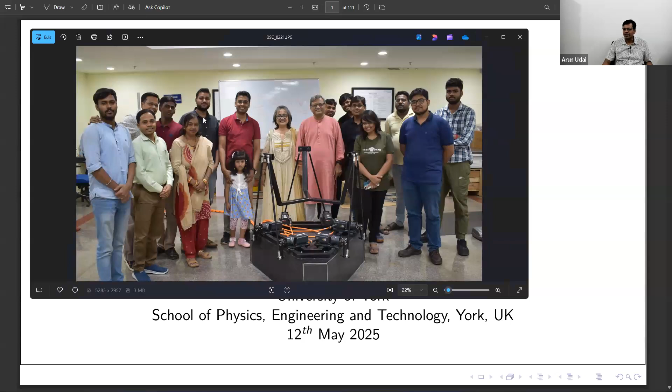So this is my whole team, including my director's wife, and my colleague. He is also there, he's Jafar Alam, and my PhD students, my master students, office staff, my wife, Jafar's kid, and MTech, BTech students are here. Manish, if you remember, he is my son, the younger one. Oh, wow, he has grown up now. He looks like you. His interns, BTechs, MTechs, my PhD scholars are behind, and he is also my PhD student.

He has actually worked on parallel robots also, and the remaining two are working on human robot collaboration. One of them is Indmani. The other one, Ashish, has done the work that you saw, that ocular robot thing. So exactly he has done it. So other pictures, I'll just come to the lab now. Hope I am not taking too much time. No, don't worry.

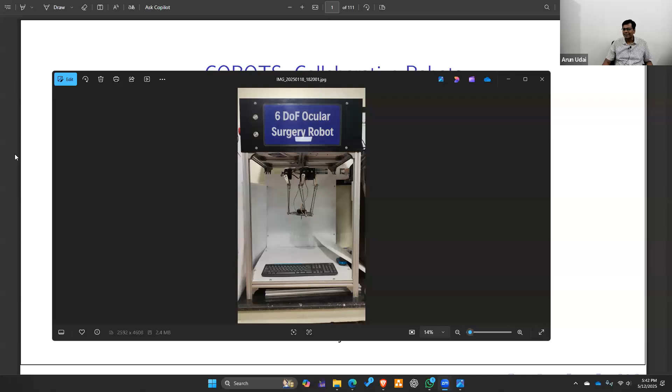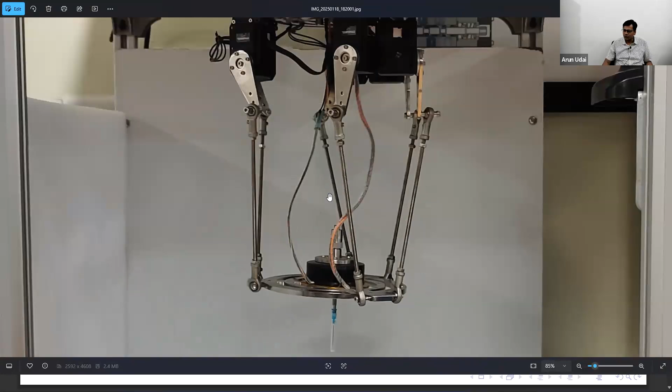So this is the ocular robot setup. It has this hanging structure, that is a 6-DOF structure. It has a rotating mechanism which is here and a provision to insert a tube from here so that it gets delivered through this needle. The needle is here, which is actually rotated. And while it rotates, you can do all 6 degrees of freedom motion using this. This whole machine was designed and developed by my PhD student, and he did the experimental work as well as the theoretical validation.

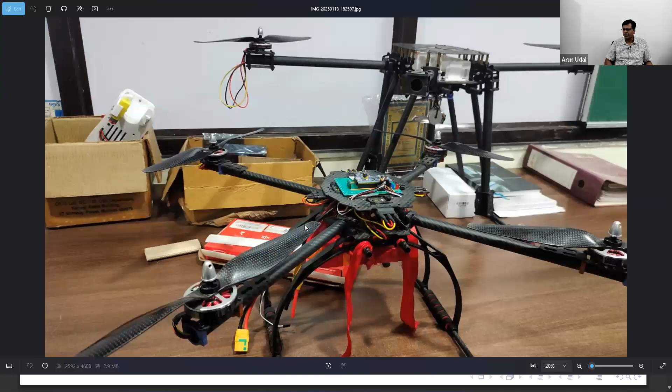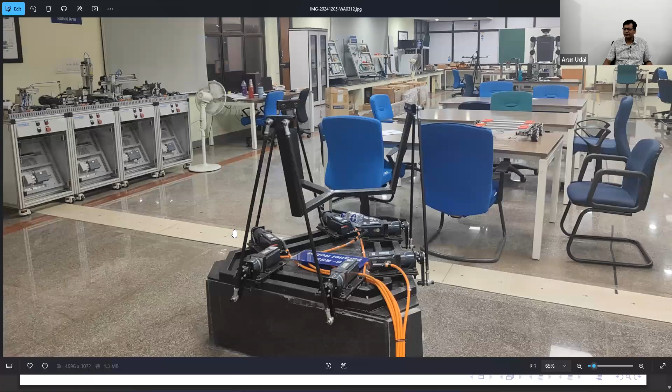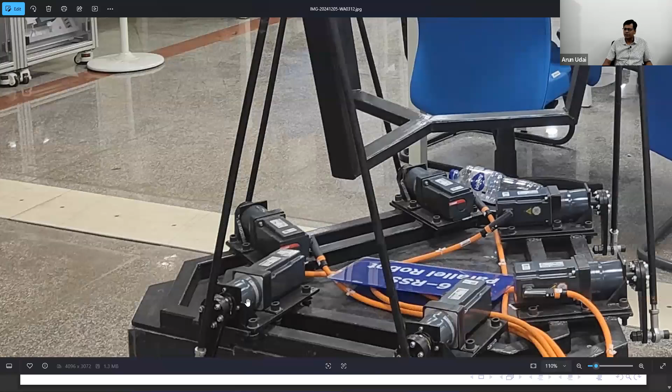So this is again a 6-DOF parallel robot that my PhD student Himanshu has built for his work. It is all built on industrial servo motors. These are all Beckhoff ones with gearbox and joint. The whole structure was built in house. So this is one structure that is there. So this is my lab. There are many such. This is a pneumatic, electro-pneumatic setup which is there.

Okay, this is a complete humanoid that I am working on in my project with DRDO. That is a defense related project, Human Robot Warfare Mission, Government of India. So it is from that, and that is for a different purpose, for doing some human robot collaboration. So this is a parallel robot, and sensors, actuator sets that we have also here.

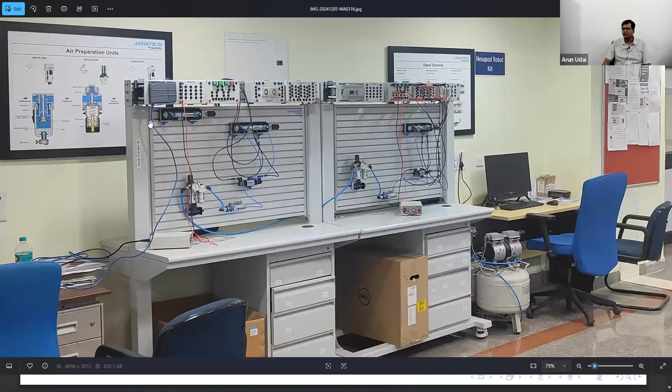So this is how my lab looks like. It's quite shiny and new, just 3 years old. This is PLC systems, PLCs of different makes we have. Okay, and this is the automation setup that I showed you earlier. This is actuator training setup. This is a customized setup that I got built in our institute only.

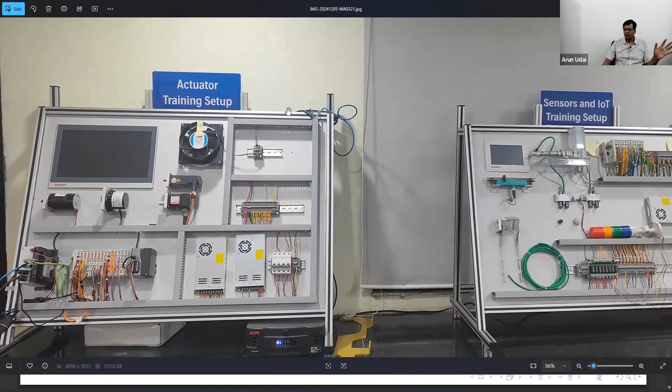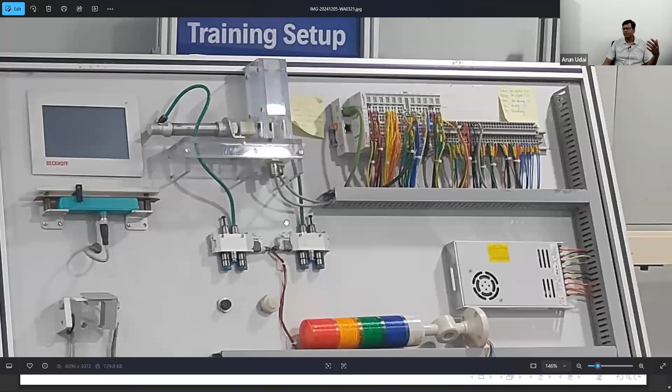Okay, so this is a customized actuator training setup, and a similar one I have for sensor training. Again, industrial kinds of sensors: proximity sensor, LVDT sensor, force sensor, strain gauge sensor, temperature sensor, pressure sensor. So all the sensors are integrated using digital IO, analog IO system from Beckhoff, connected through TwinCAT, EtherCAT based communication. And again it is accessible to IoT based system. It can be controlled remotely and monitored remotely. Basically it is a sensor setup.

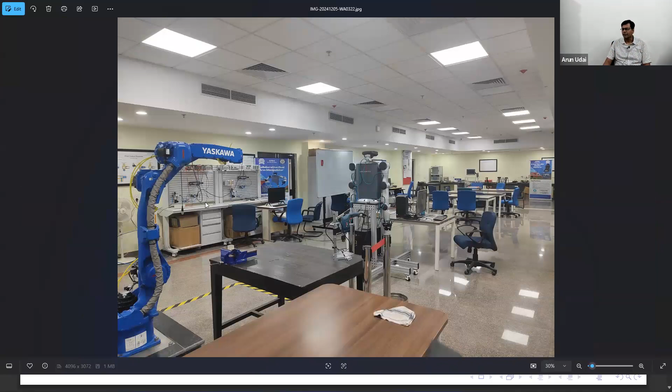So these are our strengths, that we work normally on hardware, and the hardware mostly is industrial oriented, so that we fill the gap. When they join, they come with standard Arduino and that kind of hobby stuff. So that transition happens in my lab, where Arduinos are not allowed. You cannot have a ready-made board, you are required to build your own PCB which can do the equivalent of Arduino. If you have to do it the microcontroller way, you have to develop your own board. Otherwise, you have to work with the industrial systems here. Finally, after getting trained on PLCs, electro-pneumatic, pneumatic and all, they build their own system and come up with systems like this.

This is a full-fledged humanoid. It was conceptualized by us and DRDO, and finally manufactured by Soya Robotics. That's an Indian company which makes it. So it has 14 degree of freedom cobot arms, total 7 plus 7 degrees of freedom, and a two-DOF head which can pitch and roll, as well as zoom in and zoom out. So those features are there. It is altogether 14 plus 2 degrees of freedom.

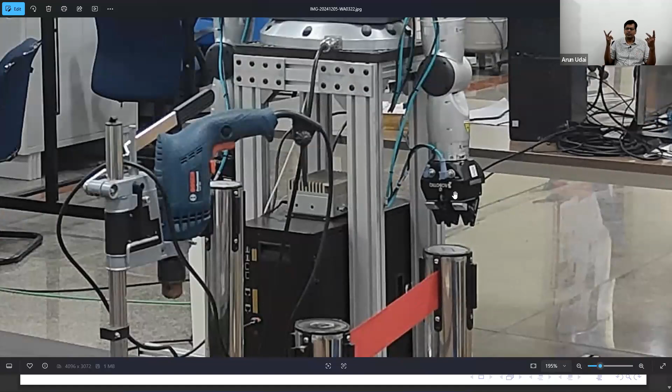And additionally, it has Robotiq grippers, which are independent three-fingered grippers. Each finger has got 3 degrees of freedom. That is not part of the robot degrees of freedom as such, that is gripper degrees of freedom. So overall, this is a complete conceptualized humanoid upper torso, which can do quite a lot of stuff, like inserting a plunger in a barrel, handling an extinguisher, handling day-to-day objects. Those things it is designed for.

Even though it is DRDO, it is not exactly for handling ammunition and that kind of thing, but yes, it has a good payload capacity to do it, and it is entirely built in India. That is something to be proud of, that India is doing this, and fully industrial motors are used for this. So this is my lab.

So I'll stop introducing you to my lab now. Now I'll come to my presentation directly. So hope you got what we are doing actually. Okay. So this is what.

So the outline of today's talk will be like this. I'll introduce you to cobots, how they are different from industrial robots, which are a standard that has been used for a long time. Incident reports that will stress the need for these kinds of cobots. I'll show an application video.

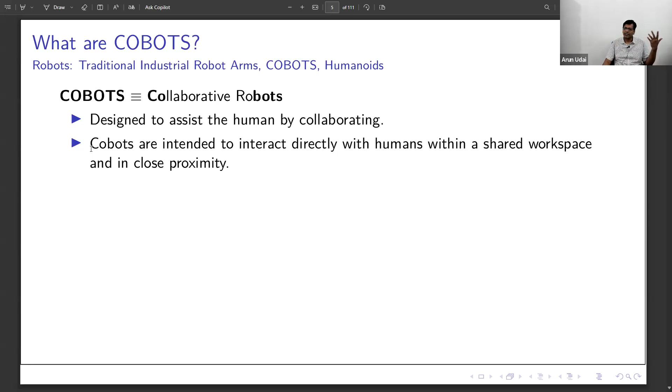We are talking about small arms instead of huge arms. Even though robots are of 5 kg, 10 kg payload capacity, earlier industrial robots were beasts actually. They can do 5 kg payload with 0.01 mm repeatability and maybe at 2 meters per second. But they can hit very hard, because in order to reach that 0.01 mm repeatability, it applies its full torque to reach those limits. Even if it is perturbed from its actual accuracy, it applies its full force. In that case, it can even apply forces greater than the payload capacity of the robot itself. Doing so, it damages a lot. So it is very, very dangerous.

So cobots have evolved as a more compliant form of industrial robot. What is compliance here? Compliance is the ability to conform to the will of others. This is a Wikipedia definition I have taken, but it fits the cobot's behavior well. When you shake hands, what is happening? One of you becomes a master, and the other just follows what he intends to do. You are flexible, you just follow what he is doing, and we shake hands. That is one example of conforming to the will of others. That is why shaking hands is so important. You agree upon something. So that is what compliance is.

A standard industrial robot, I have put the definition here, is an automatically operated machine that replaces human effort, with or without any resemblance to humans. It may or may not look like a human. They are usually programmable through a computer and can carry out a complex series of automatic tasks.

So that is the standard definition of robot, and I won't go deeper into robot definition here. So robot here would be a little different. Robots are not inherently collaborative or non-collaborative. This collaboration is determined by the design of the application system.

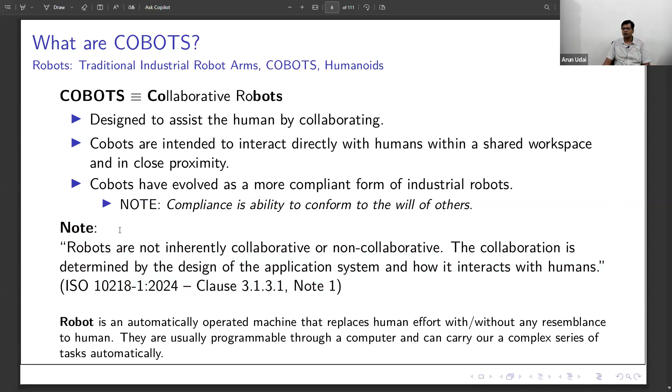With the increasing payload of cobots nowadays, you have to define cobots by their application, not by their inherent characteristics. So that is the first difference that has come in 2025. Although ISO 10218-1 came in 2024, clause 3.1.3.1 note 1, you see this definition, but this is carried further in 2025 with some more additions, that industrial robots may also be a cobot provided the application allows it to do so. So I'll just talk about a few applications after this. So this is what a collaborative robot is by definition.

Okay, I'll show some OSHA incident reports. Okay, so be with me now. So yes, these are some standard reports from OSHA, that is the Occupational Safety and Health Administration, which is there in the US Department of Labor. I'll just reshare once again. Okay, so this is what I get.

If I search for robot based accident reports, there are many fatalities which are reported. You see, employee dies from chest injuries when crushed by robot arm. There are many accident reports which are already online. It is not just internationally reported. There are many in India, maybe in your country also. Probably you will find many accident reports.

I have compiled a lot of accident reports which are reported in Times of India, Deccan Herald and many others, which happened in automobile companies and many others. So apart from this US compilation, which is literally a huge one, it details a lot about these accidents. Patient dies, employee dies, employee was killed, and those which are not fatal sustained injuries. So those are reported. If you get into these, it tells the need of cobots. By itself it will tell you why it is required.

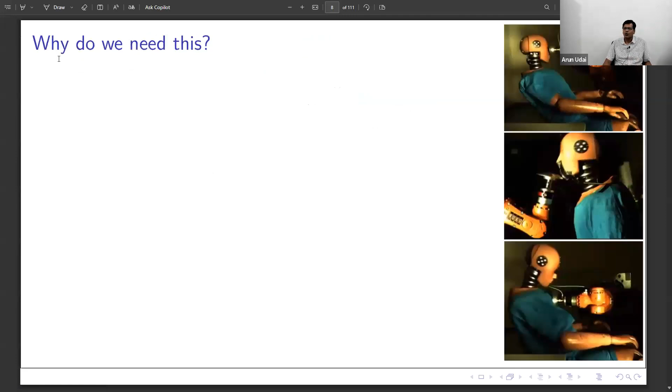Let me go back. So this is OSHA that I have shown. Why do we need it? Based on some studies, to avoid accidents due to impact or collision accidents, it causes pinching, crushing or trapping.

So these independent terms have a special meaning in ISO standards also. They have defined it to be very specific in standards. So compliance is the ability to conform to the will of others. It is the inverse of stiffness.

Stiffness is more relevant in terms of a spring. Higher the force, higher the displacement that you can create. So compliance is inverse of that. It is very much important in terms of assembly tasks.

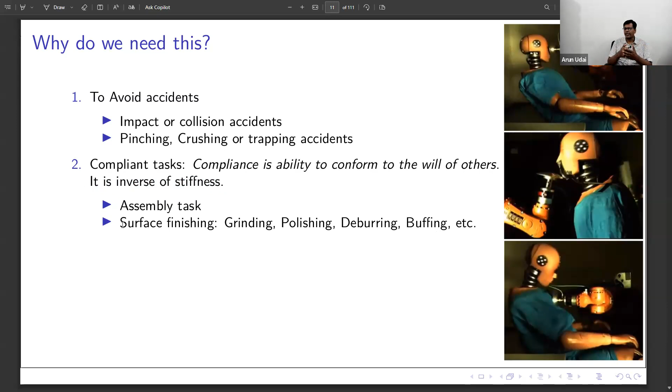Surface finishing, that is for grinding, polishing, deburring, buffing - these tasks, wherever you find the robot in contact with the object, you need such a robot. Cooperative manipulation, you want to manipulate an object in a cooperative way, when maybe a human is holding from one side and robot is holding it from the other side.

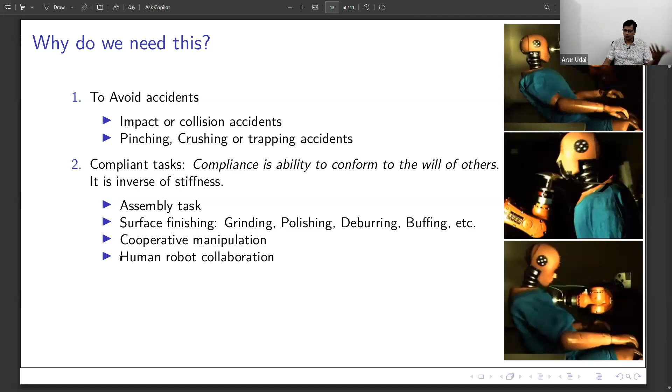So in those cases it is quite important. Human robot collaboration, human robot or robot robot, so both are equally good. For such cases you need a robot like a cobot, for safety of the robot and its surrounding environment. This was studied in detail in the German Aerospace Center DLR study, a study on human robot collision.

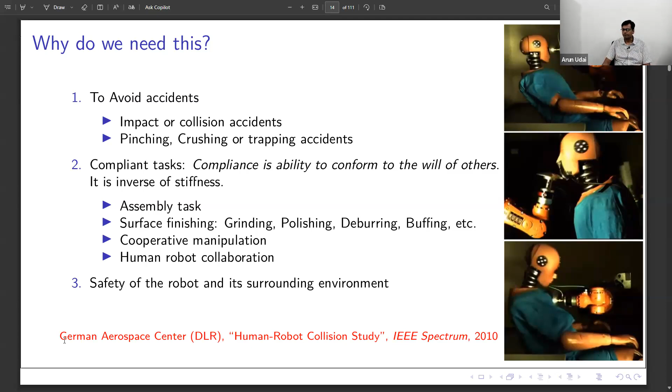This was reported in 2010 in IEEE Spectrum, and these pictures are from them. They studied the impact of the robot when it hits the forehead, chin, chest and various upper body regions using a dummy, and specified what could be the maximum interaction force which a human can take up without severe injury. Those studies were published and finally it came down in the form of ISO standard. So this was the first independent study done and reported.

I'll show you one very good video again which shows the application of these robots. There are a few applications that I want to show you here. Just watch carefully what is being done.

It is a coordinated manipulation where you have a standard industrial robot and a pre-programmed positioning robot. They are not force controlled robots. That is used here to do the task. So that is a standard robot, although two robots are holding the object and one of them is doing work on that. So you have multiple robots in the workspace.

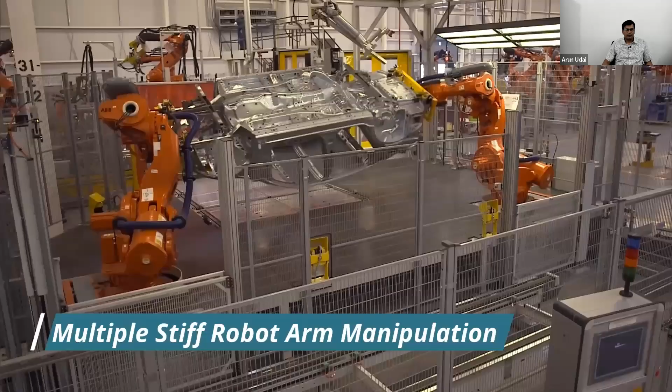All these are stiff arms, they are not compliant arms. So that was the older technique to do compliant tasks here. They have some fixtures attached at the end effector which can take up those uncertainties in the motion and take up the forces and get things done.

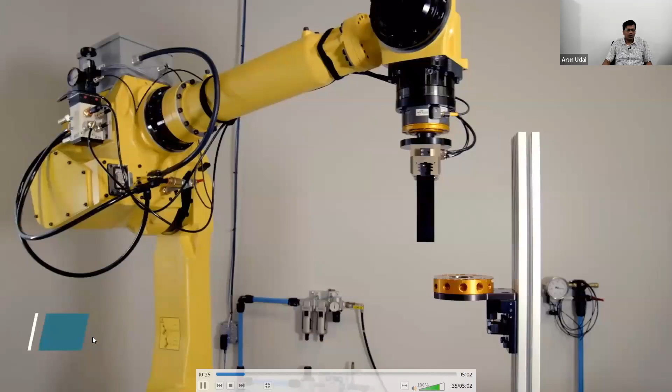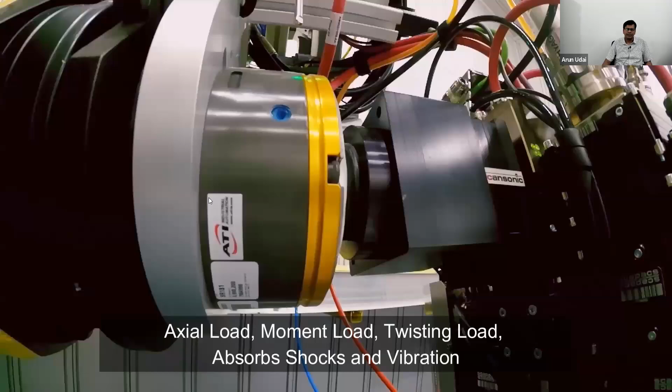So how is that possible? You have a collision safety device. If there is any interaction, it has taken up deformations. If it interacts with any environment or uncertainty, it can take up vibration, it can take up twisting, it can take up load, and at the extreme end it can even stop the robot - it triggers the switch and stops the robot.

So these are standard industrial robots - mind it, these are not cobots - but they're fitted with some compliant-like structures at the end effector afterwards, so that they can take up those kinds of jobs.

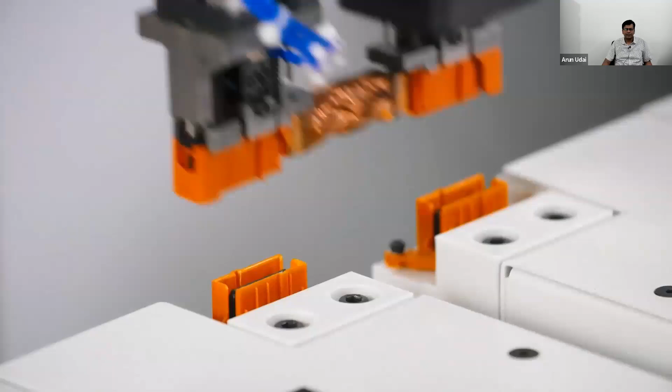So either the robot can be flexible or the object can be flexible. Here handling flexible objects, you can see these are battery terminals where you are connecting two different batteries using a terminal. The terminal is a flex kind of wire that is used, which can be bent, so it is easily doing the job.

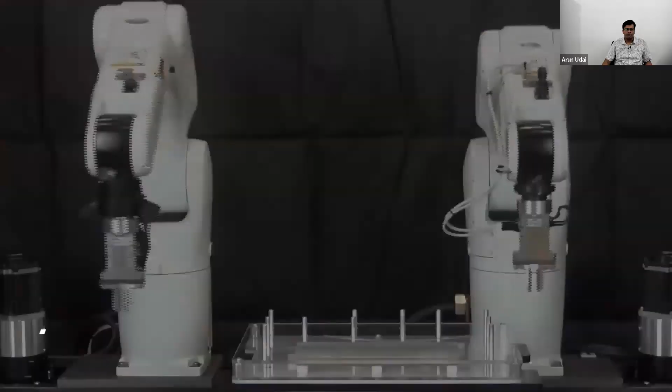Coordinated flexible motion, you see it handling a plate which can be bent, so stiff robots can't do it - either the robot or the object needs compliance. This is sequential collaboration, when one by one things are getting done, few parts are done by humans, others by the robots. Again there is requirement for some compliance in the structure, in the machinery around.

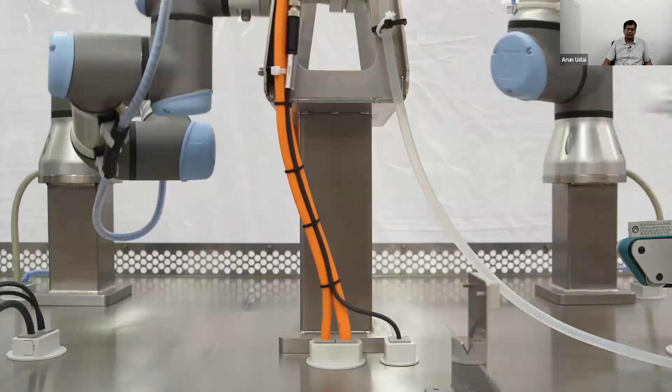You can see it can press the taps to switch it on and off. Conveyors are flexible. Cooperative manipulation - this is an assembly task where both robots are interacting with each other.

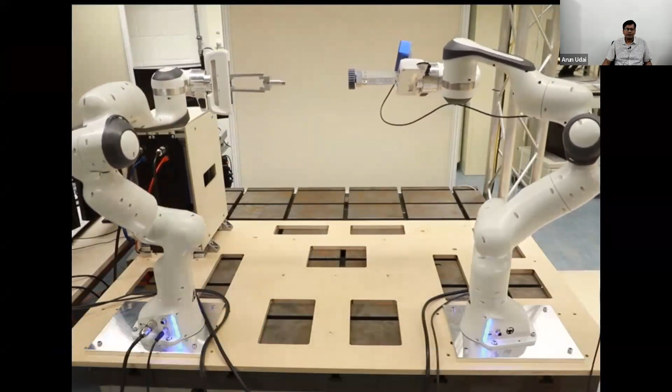Both the robots are compliant. They are torque controlled robots at the joints, and it is doing assembly tasks. This is responsive collaboration.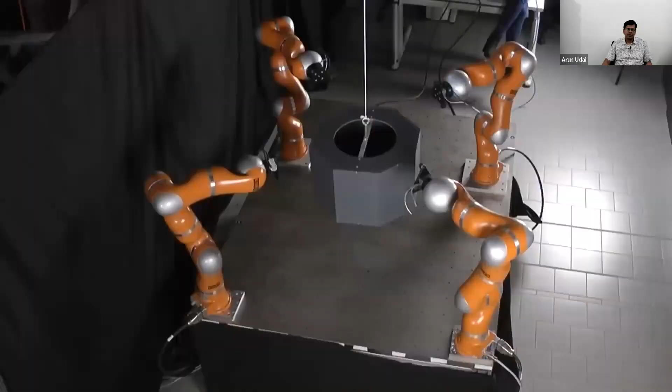Again, both the robots are holding things just by using forces, they are not holding it physically. That is possible using impedance controller and AI/ML based learning techniques. It is being done the way humans learn, robots are made to learn. Similar work is seen in compensating object dynamics where multiple robots are handling the thing.

All these are from references, I have cited them at the end, you can go through that. So it is manipulating 3 kgs, you can increase the load. Again, it adapts to the new changes which is there, up to a 9 kg object. Any external human, if he or she also starts doing it, can take up.

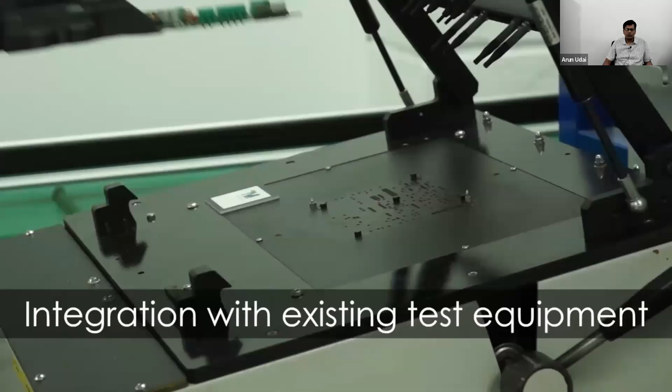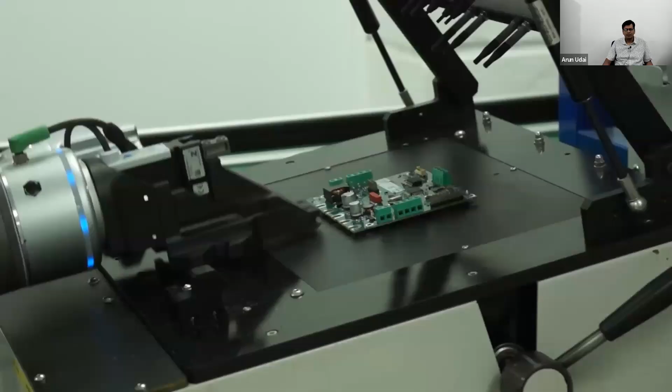This is process automation, this is cobot in the industry, shown here in a PCB testing setup. Robot does a sequence of tasks being compliant, so any inaccuracy here and there can be taken up by the robot's compliance. The PCB is tested and then it will put it back to the place where it has picked up in the next bin, and the work carries on.

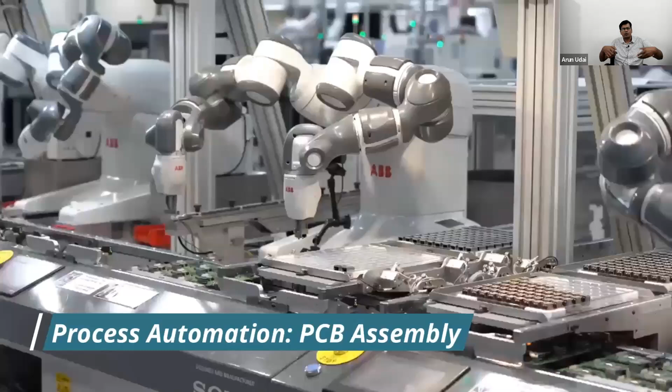This is again an industry, PCB assembly industry, where a multiple dual arm robot, ABB Yumi, is doing assembly of Raspberry Pi, that popular board you already know. Again multiple manufacturers are involved here: Raspberry Pi is the PCB manufacturer, automation done by Sony, robots used is ABB. So not just a single company is doing it, whole of the integration is there.

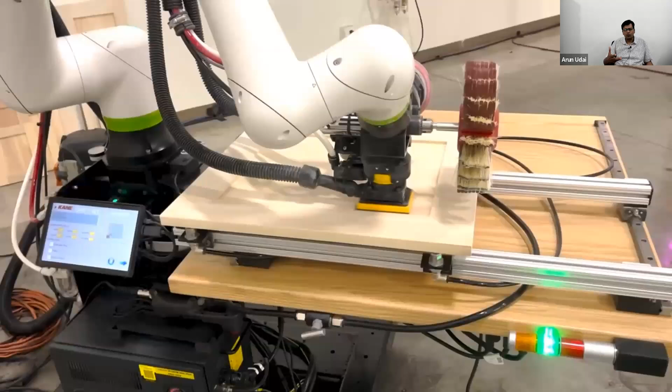As I said, collaborative task is now defined by the application, not by the robot. ABB Yumi may be a cobot which is designed, but yes, given the high velocity, it can even damage humans.

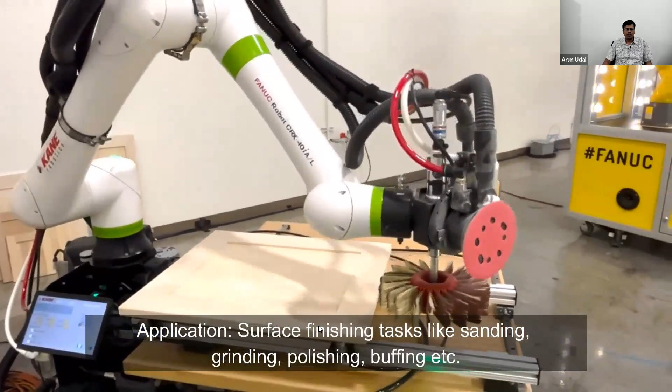This is surface finishing tasks, that is polishing and sanding operation, where you need a constant reaction force to be applied over the surface to make it a uniform machining thing. So that is being done.

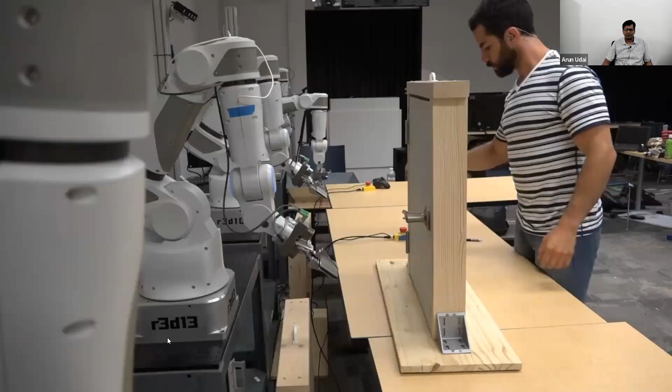Again, a constrained motion task. You know why it is a constrained motion task? A human by default can handle this, we have learnt over the years. If you are opening a door, invariably what you are doing is making your end effector, that is the gripper, move in a circular arc, and that arc has a fixed axis of motion. You don't know that axis of motion, but you could create that arc in the space because you are compliant, and you are just commanding to go from one place to other without actually making yourself create an arc in space. So because you are compliant, you could do that.

So that is what is done here. This person is changing the axis of rotation, just holding the handle and moving it. You need not know the axis of rotation, but still you can do it. Similar thing can be done, let's say you are opening a drawer. You need to know the axis of the drawer, but you don't know, but still you could do it. So yes, this is one application where you found a robot can do such task.

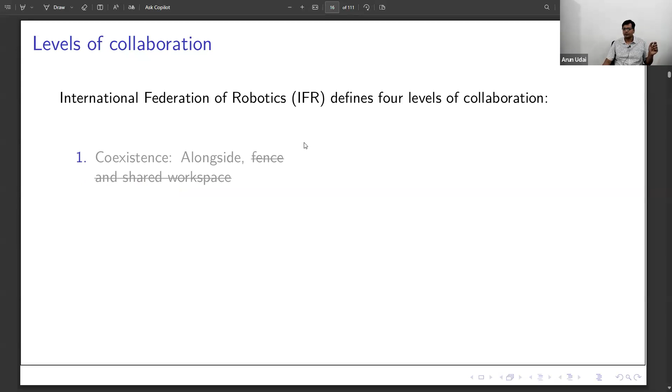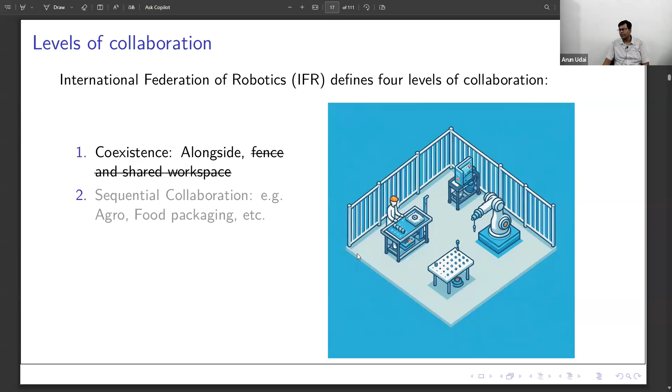Next one is sequential collaboration, where you may not enter the robot workspace, but yes, you can pass on your object to the robot, like it is done in agro, food beverage industries, food packaging industries, palletizing task, where you do something and robot does something. Both have an independent workspace and you are not entering that, but there is a common object in between. So that could be a sequential collaboration, that was there in one of the videos also.

And then comes the collaborative, cooperative operation, when both of them are in motion, transportation is happening.

If you remember, when you carry a cot from one room of your hostel to another, you are supported by a friend. One of you automatically becomes the master, with eyes and senses on, seeing the path and taking it to another room. You just follow the forces, lift up the cot from your end, and follow the path, and finally both of you have transported the object from one place to another.

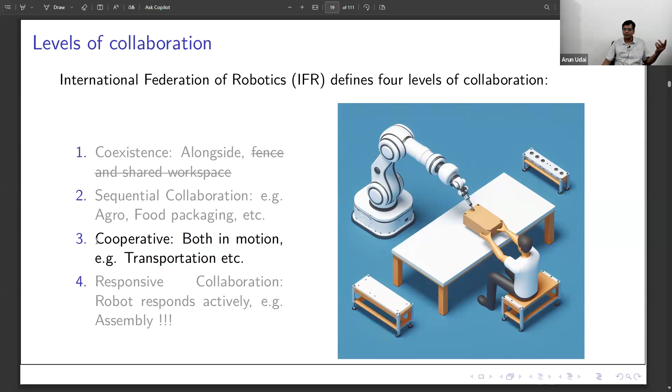So both of you were in motion. That work is called a cooperative task. And then the final level of collaboration is responsive collaboration, when the robot responds actively.

In such a case, one hand is handling something like a peg-in-hole task, when you have a plunger at one end and a barrel at the other, trying to insert it. Maybe a cap at one side and a pen at another, and you are inserting it. Both hands were collaborative and both were feeling the forces, accordingly adjusting the precise motions so you could do it. Such a task is known as responsive collaboration.

When the robot responds actively, both may be required to be cobot kind of. So these are the four kinds of collaboration, and the same was shown in the video also as an application you saw.

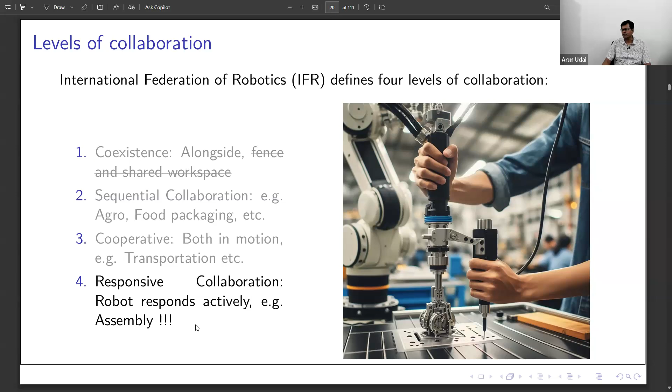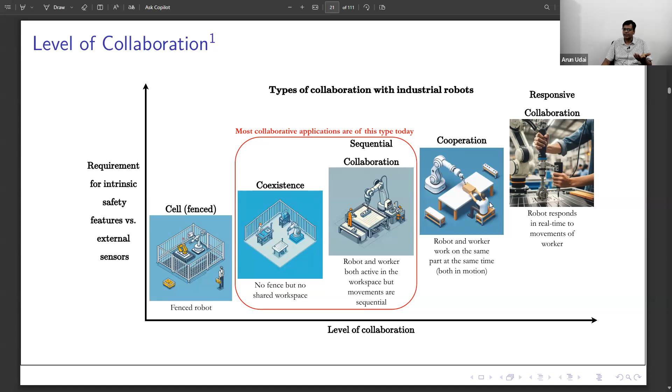So we aim to reach somewhere in responsive collaboration. Hopefully medical robots are required to be in cooperation or in responsive collaboration mode - it is not always sequential collaboration. I have seen robots for hair transplantation, robots for doing laparoscopy surgeries - those robots are of this kind. So yes, this is the level of collaboration.

So what are the safety standards that go into such robots? Apart from the standard robot standard, ISO 9283, if you look upon the technical specification of a standard industrial robot, it mentions ISO 9283 for repeatability. It is basically a performance criteria evaluated based on this ISO standard, a standard for any machinery, especially robots or any CNC machine.

It uses this standard. Also ISO 13849 - this is basically the year in which it came up - is safety of machinery. So these two are always there with any robot, any machinery. So what is special about cobots? Again, these two are there for any machinery, not just robots.

So you see the European OSHA directive - occupational safety and health assessment, European Union OSHA. The site I haven't shown, but it is there - European Agency for Safety and Health at Work. That is the machine directive, the standard for machines which even cobots follow.

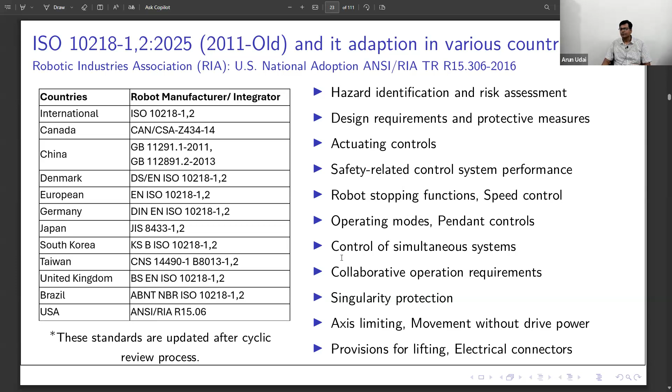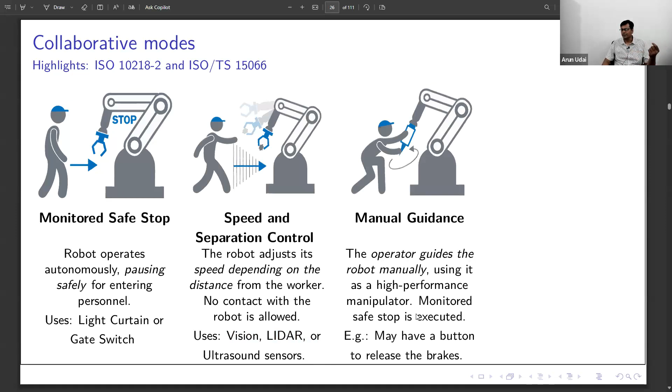Operating modes, teach pendant, control of simultaneous systems. So these are some. Collaborative robots have many modes. Monitored safe stop: the robot automatically stops when a human enters the workspace. Speed and separation monitoring uses vision, LIDAR, ultrasonic sensors. Then hand guiding: the operator guides the robot manually. You may have a button to release the brake, which is there in most robots, and this actually is not a cobot, not all these.

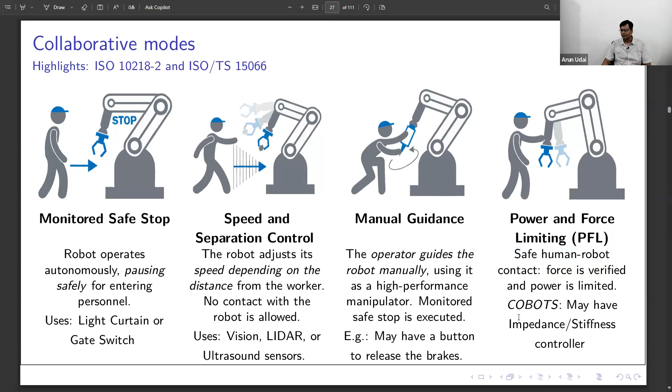When you have power and force limiting, safe human robot contact is established, force is verified and power is limited. That exactly is a cobot architecture, defined in the ISO standard mentioned here. So power and force limiting for quasi-static and transient contact, which I'll explain here.

So what is quasi-static contact basically? Contact duration is long. The limiting criteria are peak pressure and forces, that is the stress generated, and the body part gets clamped between the moving robot and another fixed or moving part of the robot work cell, the kind of picture you can see here. This is a quasi-static contact. It is very important to know this because the maximum force generated is limited by the cobot.

Next comes a transient contact. Contact could be incidental, intentional or due to robot failure. Contact duration is less than 0.5 second. Limiting criteria are peak pressure and forces, again the energy transfer that is happening, and the body may recoil or retract from the moving part of the robot.

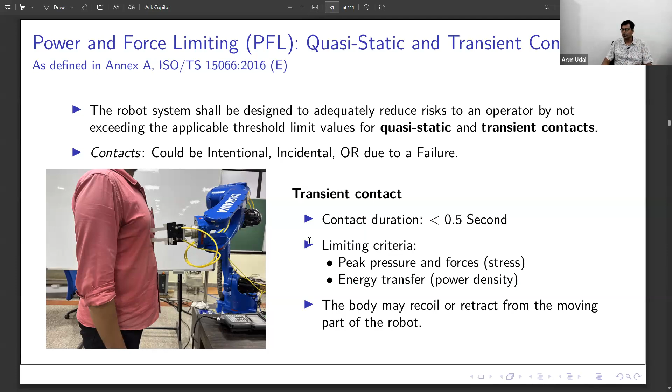So again this is defined by the cobot kind of application. If it is a cobot, it is different. If it is a robot, it is different. Again, it is defined over here in this standard. So yes, there are various biomechanical limits for the onset of pain that are defined in this standard. Maximum allowable forces are different for different parts of the body.

There are 29 different body areas which are defined. So maximum allowable pressure ranges in this, forces within this, and if it is a contact like the human head or face, it is different. So a multiplier is applied there. So these are reported values which can be found here in this work.

So collaborative operation is in between this, when onset of pain is within the definitions which are here. After that it causes injury and it is not a collaborative condition, right? So pain, yes, even cobots can cause pain, but there is a threshold which can cause injury. So these are different identified body zones. I need not read them out, it is there in the standard which is mentioned here. I have just taken it from that.

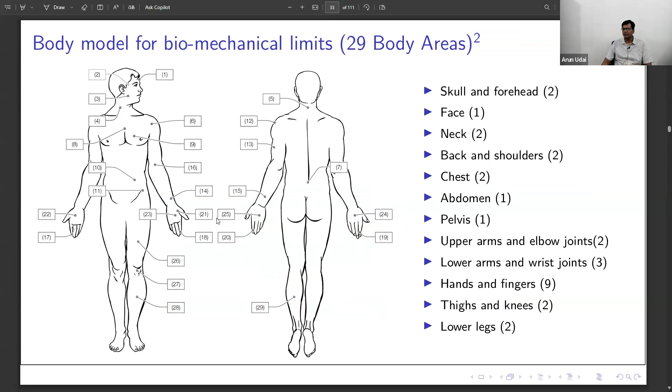So these are different body parts which were studied by the DLR study which I have shown earlier, and later on it was reported at various places in different studies across the world. So based on that, this decision was taken. Forces should not be this much, maximum allowable stress should not be more than that. So these are a few of the constrained motion tasks.

So how can a robot generate force if it is constrained? By default, a robot can move in 6 degrees of freedom, right? 3 in translation and 3 in rotation. So wherever it is constrained, you can generate force. So let's say you are writing on a blackboard or a whiteboard. You are constrained in that you cannot get into the board. So that is the only direction where you can see the reaction force. In other places, you are free to move and you cannot generate force, right? So this is writing on a board where the force axis is perpendicular to the plane of the board.

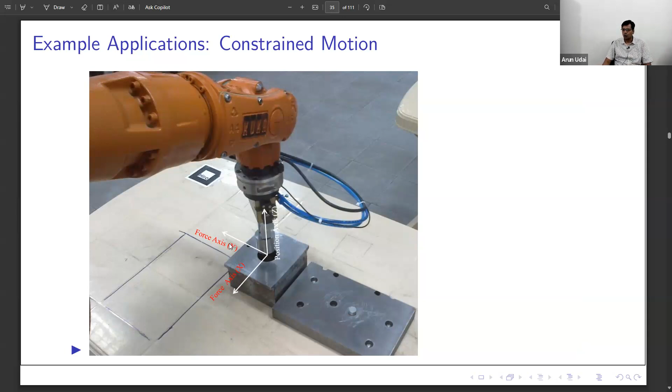Next one is inserting a peg inside a hole, right? So again you see, you are free to move in the vertical direction, but you cannot move in orthogonal directions along the wall of the hole, right? So you can generate forces along the x and y plane, that is along the wall, and you cannot generate any force vertically. So this is the constrained motion. So the robot is supposed to be programmed for these constrained motion tasks.

So this is a vision based task, because vision systems by default are not very accurate as compared to the robot's accuracy. So when you reach as guided by the vision, if you try and pick up that object or handle that object, there may be some inaccuracy in between, and that causes force to rise up like anything. So that can cause damage, right? So that is the reason why you need compliant robots.

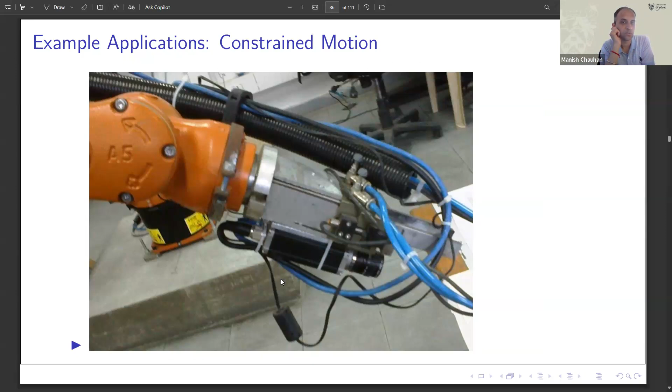Arun, sorry to interrupt you. I was just wondering, it's really interesting to see all these things, but I don't want you to rush, so if you think we can do a part two of this lecture, given that maybe some of these students have to also go for another meeting. Yes, yes, yes.

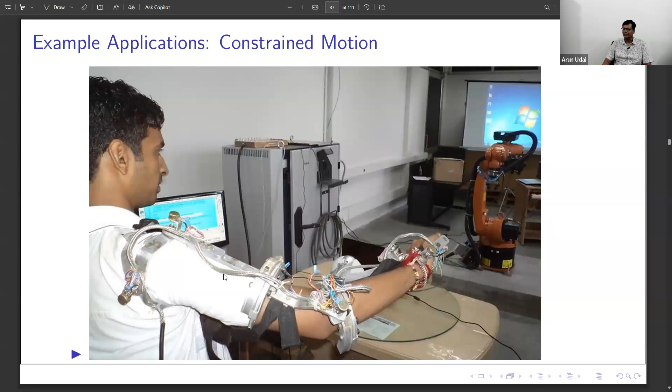Technology transition. No, I don't want you to rush. It's really interesting to know, but if you think, then we can do one more.

No, this is a very important slide. I'll stop here and I'll explain. So let's say it is a straight kind of object. Let's say it is a pendulum. You are moving in space.

So there are two ways to move this pendulum. One is you may have a joint which is fitted with an encoder or a sensor which gives you the position, and you continuously see the position, keep moving until it reaches its desired position, and you stop it. That is one way to do it.

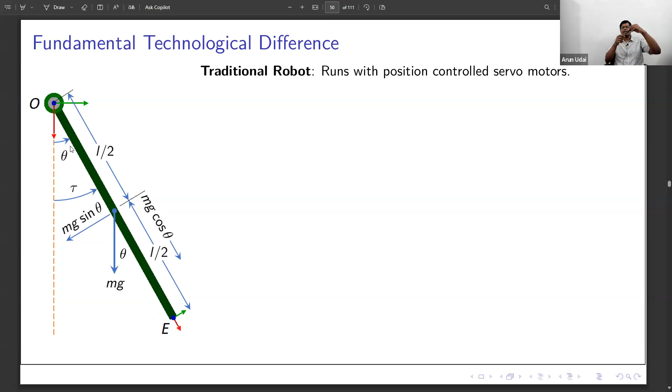The other one could be, you know precisely how much torque is going to come at the joint if you want to take it to a particular angle. So if you apply that much torque, the robot precisely reaches there. So a traditional robot uses the first approach. It senses the joint angle and keeps on moving until it reaches there. While doing so, if there is any obstruction, it will apply its full capability to reach there and it will damage the environment.

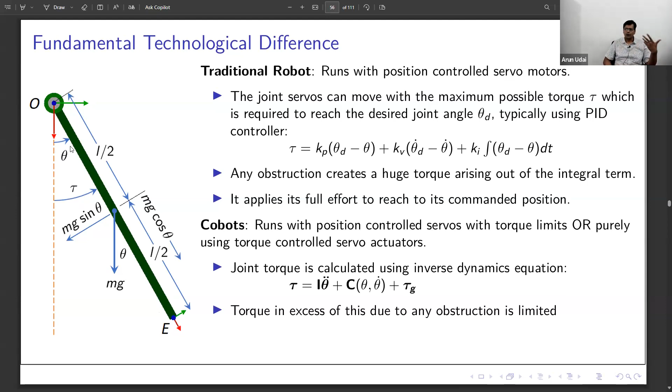While the second robot, that is a cobot, doesn't run in a position control mode, rather it applies the torque at the joint to reach a place. So any obstruction in between will cause more torque demand, and because this robot is power and torque limited, it cannot take up that much torque and it stops there until that obstruction is removed. So hope you understood this fundamental difference between the way a traditional robot and a cobot are controlled.

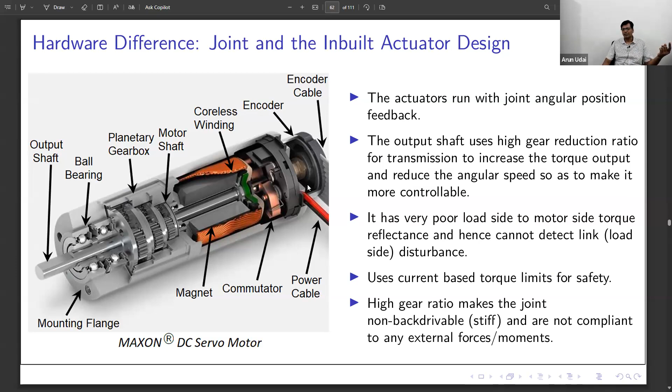So that is the fundamental difference, and this is the earlier joint actuator design which allowed only the joint angle as feedback. This had a high reduction gearbox, so it doesn't have torque reflectance, so it cannot feel the forces, so it cannot do anything about it. It can only sense the position, and it was purely a position controlled robot, while the new robots are very different.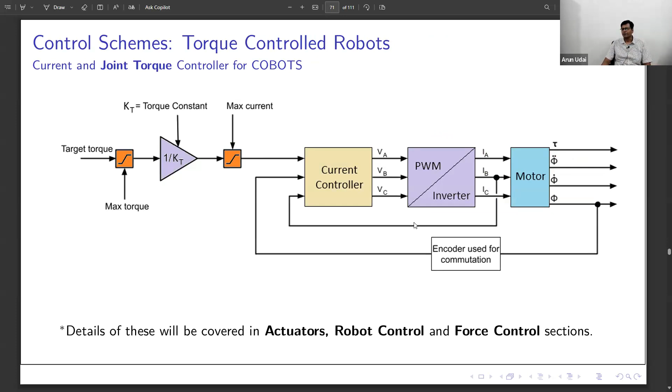So this is what the standard robot design should look like. It is lightweight, it has concealed wires, soft and rounded edges, an inbuilt self-calibration system with mechanical stops, safety against pinching and trapping hazards. So it follows all these safety standards, electromagnetic compatibility, vibration and shock resistance, and many others which are also there in robots.

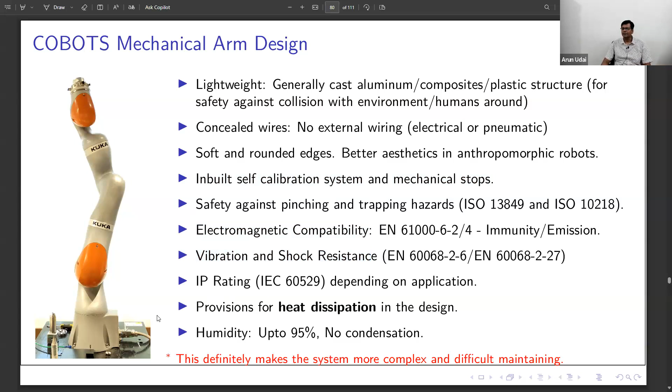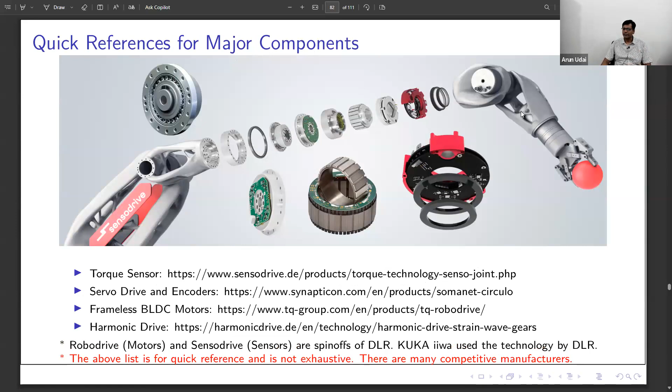So this is how a cobot is made, and these are standard hardware and software systems. How do they look and how soft are they? Controllers and teach pendants are mostly the same, but the hardware controller is built differently. So this is how it should look, and that goes inside. If somebody is interested, they can go through these quick references for the major components. These are the links that I have mentioned here. If you are into design, maybe you can go through each of these links.

So I'll just show a small video now that should sum up everything instead of showing the independent slides. So I'll just show this video now. So hope this is very interesting.

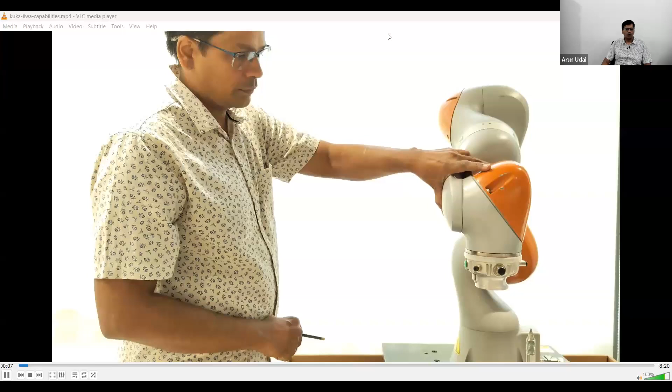So yes, I am able to drag this robot, you see, anywhere. I am able to take it to different places because it is gravity compensated in space. They are compliant, and so this is very much useful in doing teach and repeat kinds of tasks, when you want to take the robot to one place, teach it, take it to another place, teach it. So it is full gravity compensation that you can see. Got it? So you can adjust the position and orientation.

I'll just skip a bit. So I am taking it to a place. Next comes gravity compensation with position control. This is very much helpful in medical robots. When you are inserting the robot through a skin hole, that hole should be stationary, whereas you are able to move the robot tip, okay.

That is laparoscopy surgery I am talking about. So that point is made stationary while you can change the orientation and change the tip position. So this is the kind of application which is done by the robot, okay. So this is selective compliance. In one direction you have compliance, whereas in the other direction it is very stiff, okay. And again stiffness can be controlled in respective directions.

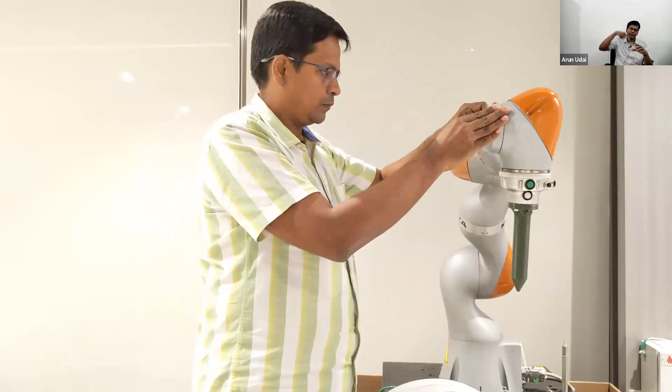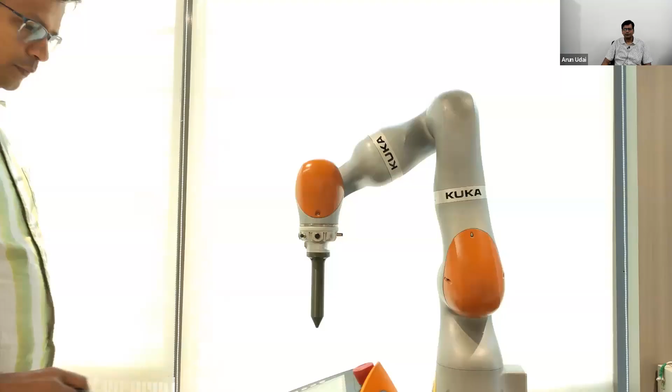So this is the laparoscopy thing that I am talking about, where you have a laparoscopy stem that is inserted into the body, and the point where it penetrates the skin is stationary. That is known as arbitrary reference compliance. Force triggered stop: if it senses any uncertainty, it stops then and there. So that is demonstrated here.

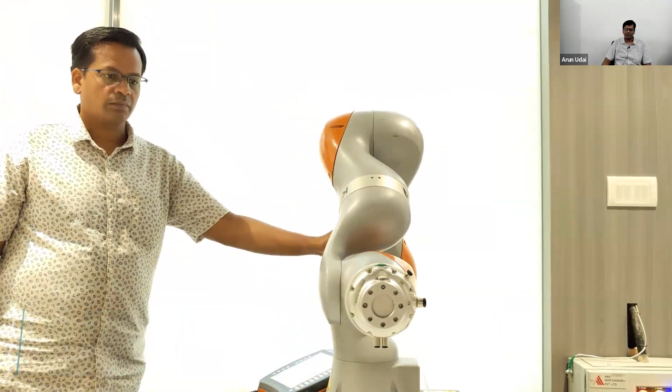This is null space, because it is a 7-DOF robot. Keeping the end effector stationary, you can move the whole of the robot body. That is very useful to have multiple solutions for the same pose of the robot. And the last one is selective compliance. This allows uncertainty in the environment; I'll move the table in between and still it is able to follow the path, continuously in touch with the table.

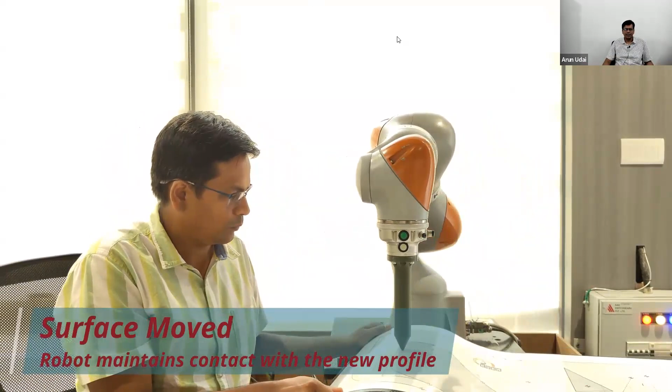So this kind of job is only possible with a cobot like this, which runs with these kinds of algorithms. So hope you got it. I have moved the table and it is still able to take up such motion. Okay, so I'll stop here. I'll directly go to my slides lastly. I won't take much time here.

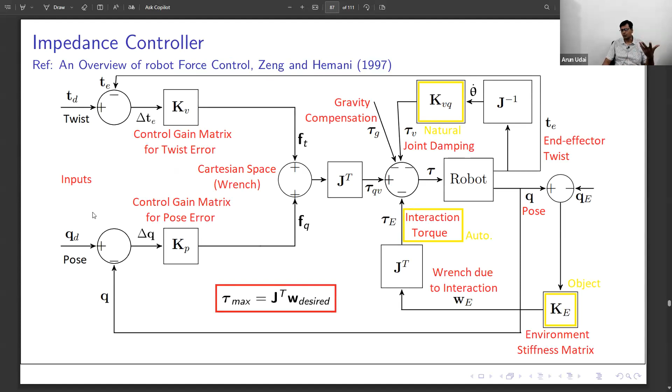So these are force control algorithms. This is the control scheme which actually works behind, which lets you do all this. This is impedance control. If you are interested, you can look through this paper, and I have a detailed video and a course on this which talks very much in detail on these aspects. So this is the hybrid force control and this is its behavior.

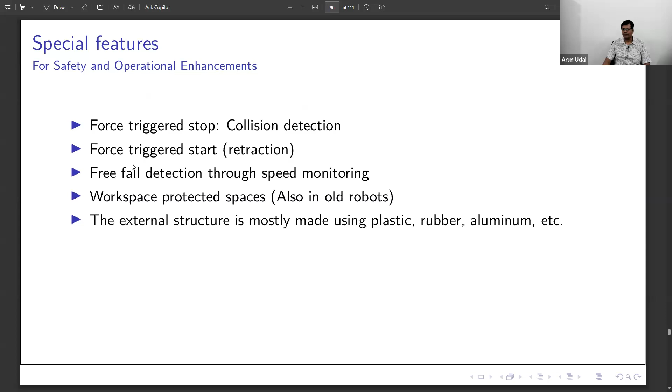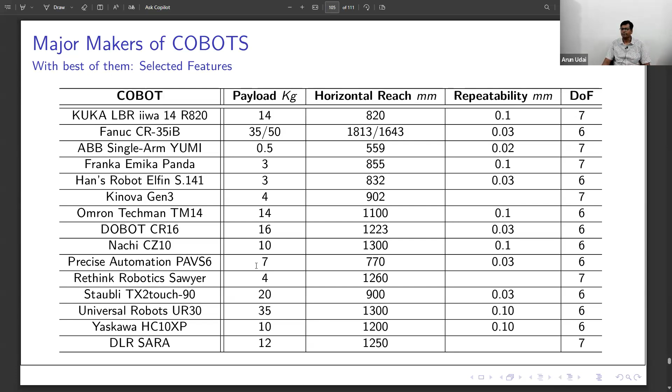It can work like a standard robot too, so repeatability could be more, but when it is switched to cobot mode, with joint compliance, repeatability is not much. So it is not as good as a standard industrial robot. This is the repeatability, and it is again 6 or 7 degrees of freedom; if you need redundancy, you can go for 7. So these are the different kinds of robots available. And these are some of the related publications which I have in these areas.